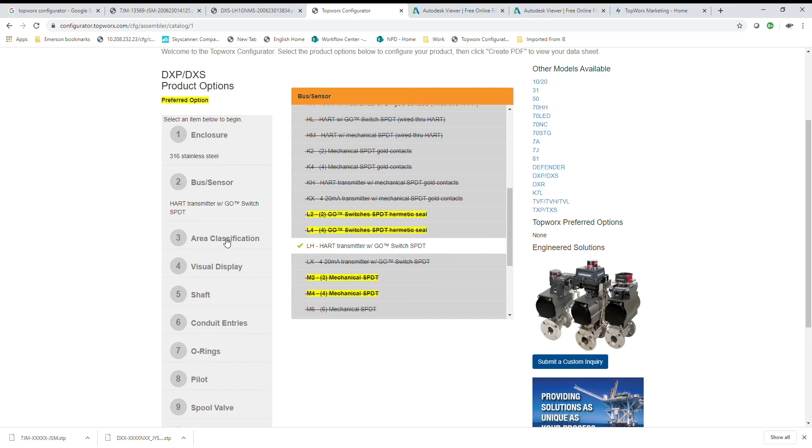Area classification - well, we're in Europe, so a lot of the times we do like a sort of explosion-proof, flame-proof enclosure. Visual display, we'll go for the standard green. Other colours are available - some sites like the yellow and black, but we can offer any sort of visual display that you need. Shaft - this just refers to what type of shaft, whether it's direct drive.

We'll just look for a standard Namur shaft. Conduit entries, again, we're in Europe, so we'll look at M20. O-ring, I'm going to start with Buna-N.

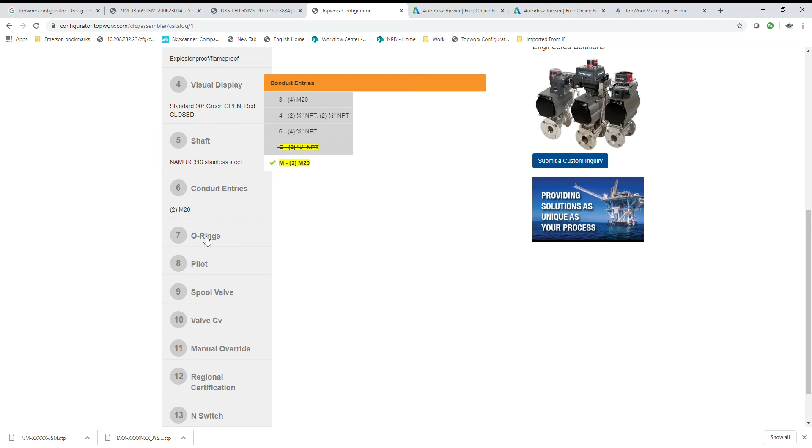And this is just to show you one of the features that we have with this configurator. So pilot on this device, I don't need any external pilot, so that's an integrated solenoid valve on the product. At this point, what you need to do is ensure that the rest of the selections we select 0. So basically, we need to fill in all the selections to be able to configure a product.

As you can see, we've got world certifications if required. So when we get to the bottom here, one of the features of this configurator is that - okay, I've gone for Buna-N, but my client in this case is looking for a very low temperature application. So I'll change that from Buna-N, unclick it, and change it to silicone, and then create PDF.

Now what this does is it goes away and creates a PDF, but just for ease, here's one I prepared earlier. So this is an example of the PDF that will be displayed. It gives you everything - it gives you absolutely everything your client will need. It gives you the overall dimensions, the specification, and the wiring diagram.

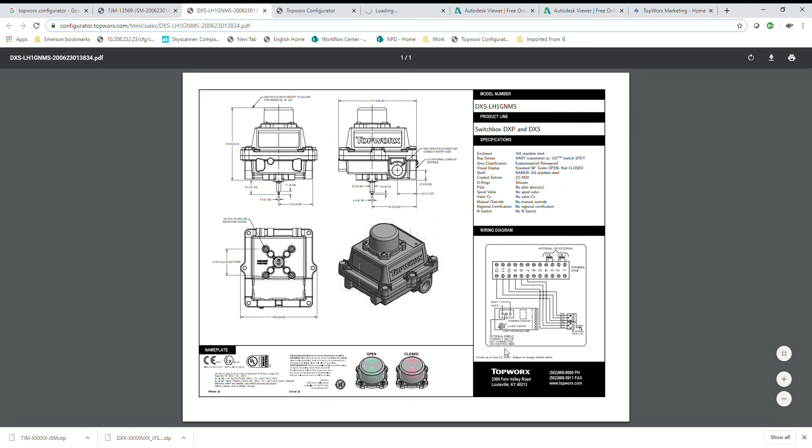Down here is a little feature that we like to promote - a lot of the times a customer on a specification will say, can you send me the ATEX cert? Very common request. So if you look here, we have the CE cert and the IECEx cert. All you need to do is copy and paste those, put them into Google, and it'll take you directly to the page.

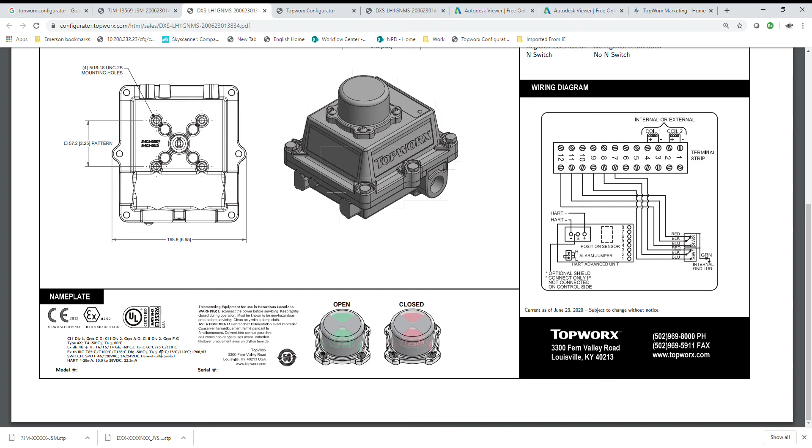Also a point to make here is that our switch boxes are certified for two different world areas. A lot of the time you may have a plant in maybe the Middle East, and that could be an American-owned plant, so it may be USA certified, or it may be a European plant, which is IECEx certified, or you just may be exporting around the world. So a unique feature of our switch boxes is they're world certified in terms of North America and European certification. You can see you've got your class div, and underneath that your EXD. That's one aspect of the configurator.

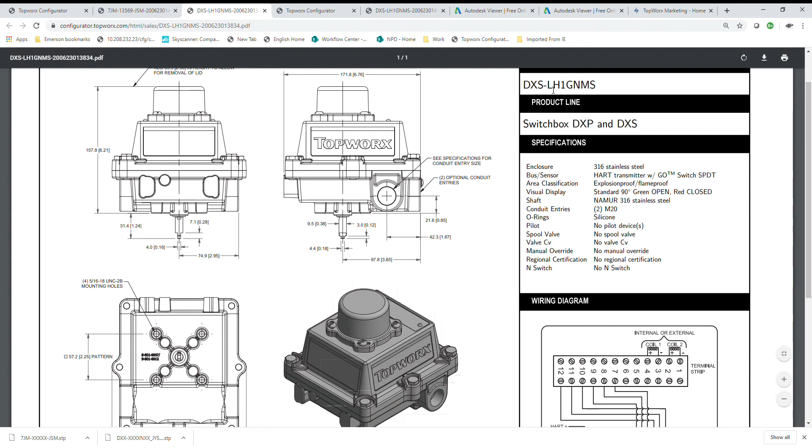Another aspect I want to point out, if we go back to the main configurator page, customers always want to make their life easier, and they want to know, are you able to send me the step file? Common practice these days. So if we just copy the part number.

On the top there, it gives you the model code. If we go back to the configurator, across the top here we've got this little section that people miss, but it says download step file. So we go to there, select what you like here. It doesn't store this information, it just likes to see where you're from. And then we retrieve the step file.

Now you've got two different types, primary and open. The open lid one basically gives you a step file with the lid open. What that's for is, imagine if you've got an enclosure and you need to see whether it might be a tight enclosure, you need to see whether you can take the lid off. So that's the reason why we give you an open lid file.

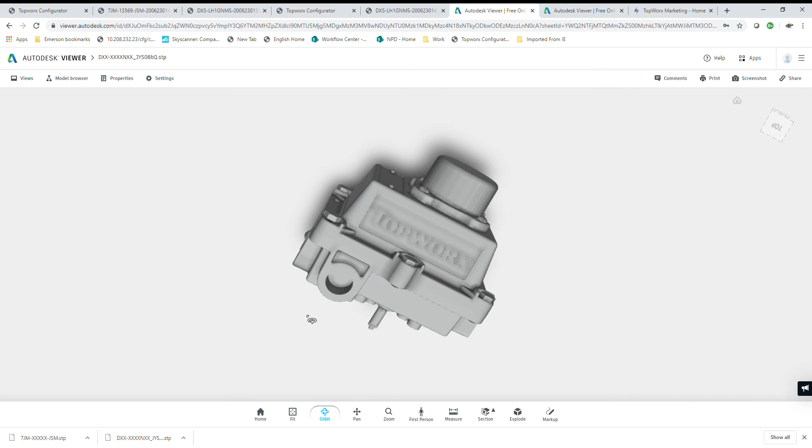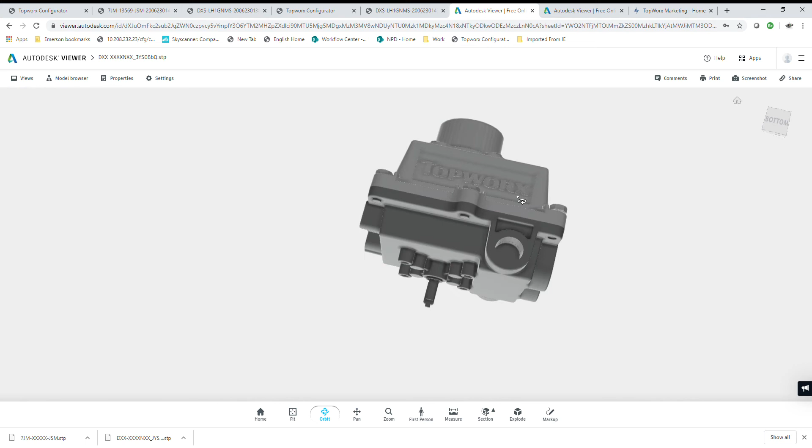A lot of you might not have software that can read step files, but I've got this downloaded, and I use an online viewer just to configure and make sure the product looks right before I send it to the customer. As you can see, that's the model I downloaded earlier. You can go straight into the customer's assembly package or whatever he's putting together. It's another bonus we have from this product range.

So that's the switch box. As we say, a switch box is one of our primary items. We developed the switch boxes some 20 years or so ago, but the company was founded on the Go switch.

So I'm going to configure one of our Go switches. I'm going to use precision sensing. What I'm going to look for, again, we're in Europe, so I'll look for a junction box version, because instead of flying leads in Europe, we tend to go for a junction box. So I'll select a model. 7JM is an M18, so again it's a metric thread.

Single pole, double throw, standard sensing. As you can see, the items in yellow are preferred options. If you're not too sure, it's pretty easy with this one because there's not that many options available. When we get to here, there's a few more. If you're not able to select an item, it crosses out for you.

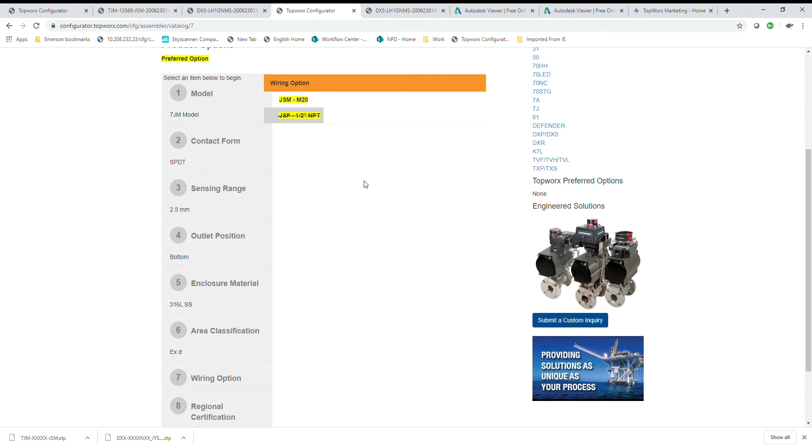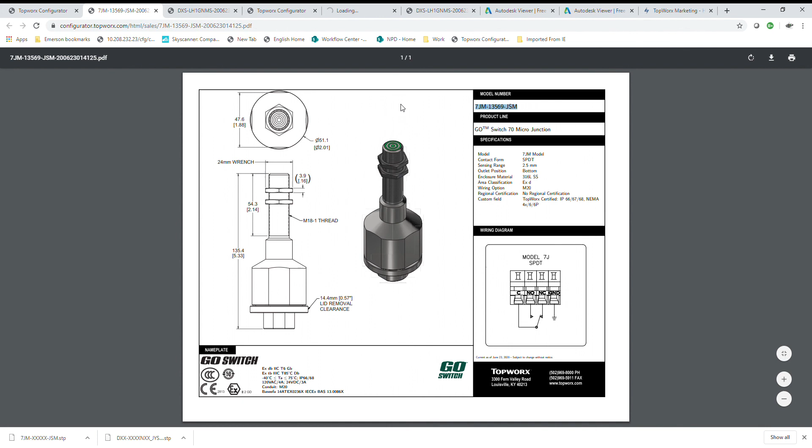In this instance, we want an M20 conduit on a metric device. Then we're looking for certifications, custom field, and we'll create the PDF. Again, what I've done here to save time is I've already preloaded the PDF. Same configuration again, copy and paste that, and we can see here, this is a model I downloaded earlier. The customer can put it into his assembly or whatever he's looking to do with that.

And it's just, as I say, a quick overview. Thank you very much for your time.